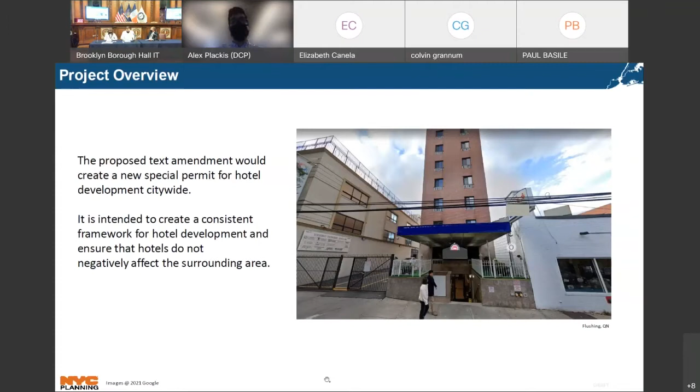So this project is a zoning text amendment that would create a new special permit for hotel development across the city. The goal is to create a consistent framework for hotel development and ensure that new hotels do not negatively affect the surrounding area. Next slide, please.

First, I'd like to start with a description of New York City's hotel market over the past decade. By 2019, before the pandemic hit, New York City had experienced record growth in the tourism industry and its hotel pipeline for the 10th consecutive year. Visitor trends peaked in 2019 with almost 67 million visitors, up from 46 million in 2009. Visitor count was forecasted to increase even more in 2020 to almost 69 million.

Furthermore, sizable growth of hotel room supply has been a prevailing factor in New York City for much of the past decade. Between 2009 and 2019, the total number of hotel rooms in the New York City market grew from just over 80,000 to over 127,000. And in the past 5 years alone, New York City saw a 40% increase in hotel inventory. Despite this increase in room supply, demand also continued to rise, keeping the annual occupancy at almost 87%. Occupancy rates in New York City are among the highest for urban markets in the United States.

The growth of the New York City market over the last decade was driven by both international and domestic travelers. And these visitors are coming to New York City for its cultural offerings, with shopping and sightseeing being the principal reason for about 86% of international visitors. Next slide, please.

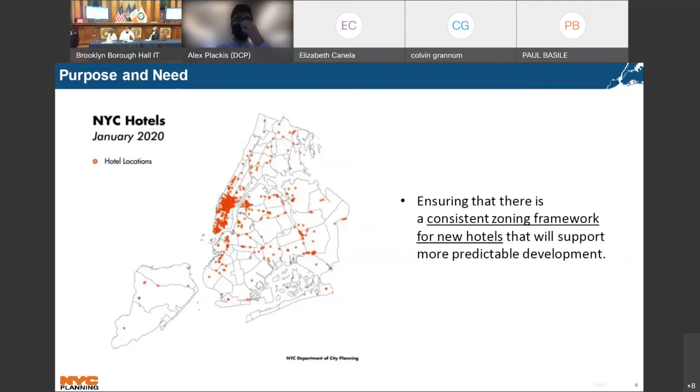As mentioned before, hotels have the potential to create land use conflicts in a variety of neighborhood contexts and zoning districts. We're already aware of the potential conflicts hotels can have in light manufacturing or M1 districts. And several C districts in the city also have hotels in areas where it can be in conflict with nearby businesses, or the site may be planned in a way that may be unsafe for guests and residents alike.

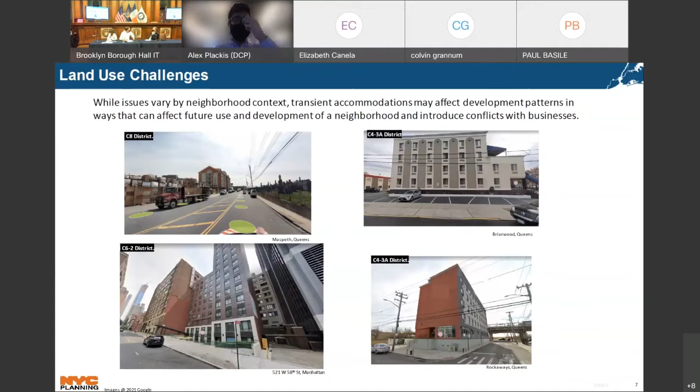So to explain the map on the left side of your screen, the magenta color shows areas that would require the new citywide hotel special permit. This means that any hotel development would need to apply for this special permit with the Department of City Planning. This process would make all proposed hotels subject to ULURP review, which includes time for community boards to review, adopt, and submit a recommendation to the City Planning Commission.

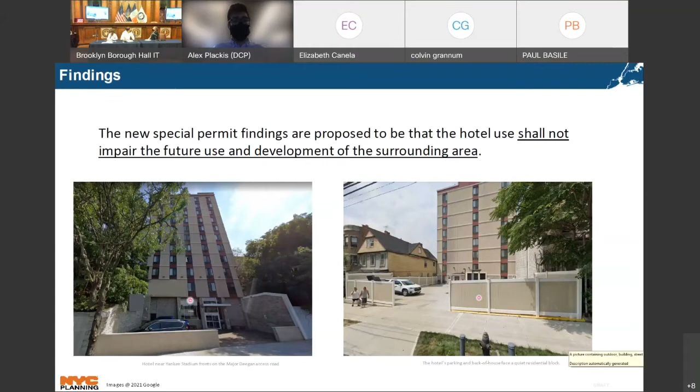I'd like to briefly talk about the impacts of the pandemic on the hotel industry and ways that we have modified the proposal to try to address these challenges.

The COVID pandemic had a significant effect on the New York City hotel market. Between January and November of 2020, a net total of 146 hotels out of 705, and over 42,000 rooms, have closed. Luxury and upscale room types accounted for almost 85% of this loss.

Estimates by the city's independent budget office place job losses in the hospitality and leisure industry at around 197,000 jobs in 2020.

So COVID has had an impact on the hotel industry, but there is optimism that the city will recover and visitors will return, with many experts placing this recovery in 2025. With that return in demand, the Department of City Planning anticipates development to return to pre-pandemic levels, leading to a need for the special permit, allowing for better regulation. However, we do not want these regulations to prevent recovery of the city.

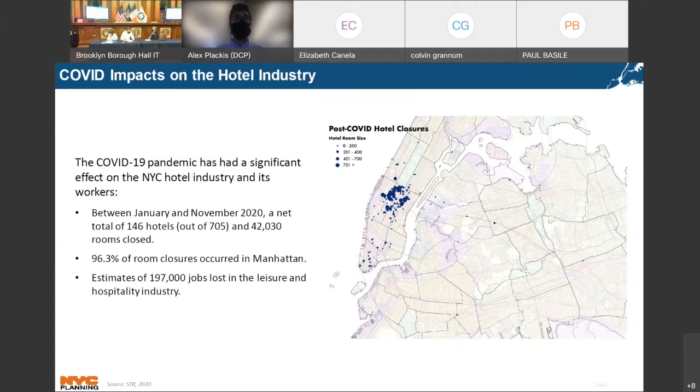To minimize the likelihood that the special permit will impair the recovery of the hotel industry, we have created these recovery provisions. There are modified vesting provisions to facilitate projects that are already in the pipeline.

Approved City Planning Commission or Board of Standards and Appeals applications will not require a special permit if these applications were approved after January 1st of 2018. Applications that begin CPC public review or are filed with BSA prior to adoption will not require a special permit.

And finally, there is an extended discontinuance provision allowing vacant hotels extra time to return to transient use. Usual discontinuance allows for a building that has been vacant for 2 years to reopen with its previous use. We are proposing an extension to 6 years to allow for these closed hotels to reopen. These provisions are meant to allow for a portion of the 42,000 closed rooms to return, bringing back an important industry to New York City.

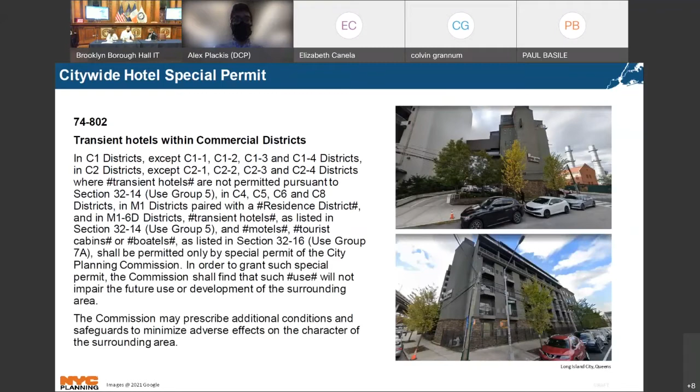Next slide, please. And if there are any questions, myself and I believe Barry Dinnerstein, the Deputy Director of Housing and Economic Development, who is currently in person at Borough Hall, are both more than happy to answer questions.

Thank you very much. I do have a few questions. I think you addressed some of them, but we'll just put them in for the record. Borough President Adams understands that there are currently hotels in various stages of development. Please describe what is being proposed to determine vested status to allow and or preclude continuation.

Hi, my name is Alex Plackis. I'm a city planner at the Department of City Planning. So the current proposal has two classifications of projects.

Projects that had filed plans with the Department of Buildings prior to the referral of the zoning text would be able to continue. Projects must then have a zoning approval by the time the proposed zoning is adopted, at which point they will be able to continue.

Normally, a project must have a foundation permit, a foundation actually in the ground, at the time of adoption of the zoning to continue. But in this case, because of COVID and difficulties people had doing construction, we're allowing people to continue developing their hotel project so long as they have zoning approval prior to adoption of the zoning text by the City Council. They will then have up to 6 years to complete the project, as opposed to 2 years, which is customary for other types of projects when zoning changes.

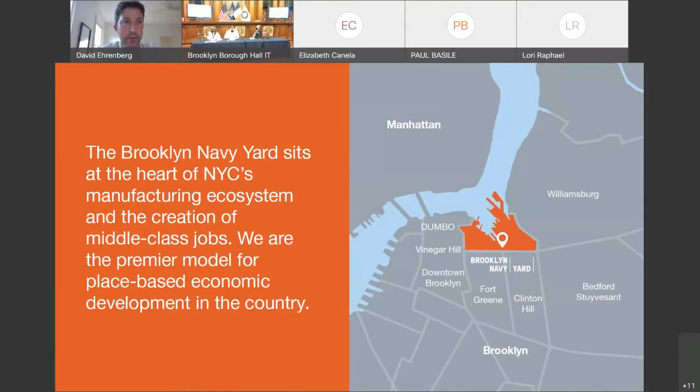We believe that the Navy Yard over the last 20 years or so has emerged as not only a unique ecosystem of modern manufacturers, but really a national model for place-based economic development focused on creating high-quality middle-class jobs that are then made accessible to all local residents. Next slide.

Quickly, just demographically about us, we're large. We're 300 acres, which for Brooklynites is about half of the size of Prospect Park. We have nearly 80 buildings and nearly 6.5 million square feet of real estate under roof. And we're currently home to about 450 companies that house or that have created nearly 12,000 jobs between them.

Next slide. We think about our mission and our model as kind of a three-legged stool. We start with a focus on middle-class manufacturing jobs. We then use the tools available to us as a mission-driven, not-for-profit landlord to help those companies that are creating those middle-class jobs not only survive in New York City, but thrive. And then lastly, we have very robust workforce development programs to help link local residents to the economic activity happening at the Yard. And I'll go quickly through each of these three components.

The focus on middle-class manufacturing jobs is something we live every day, and we think the numbers explain why they are a critical part of the New York City economy. The average wages in the industrial and manufacturing sector are between $50,000 and $75,000 a year, depending on the exact definition. That is a living wage in New York City. And if you compare those to other truly accessible sectors in our city economy, the wage difference is very transparent, nearly double wages. And yet the manufacturing sector is deeply accessible, with about half of the workforce having nothing more than a high school diploma. And if you add a 2-year college degree or post-secondary credential, that goes up to about 80% of the workforce having something less than a 4-year college degree.

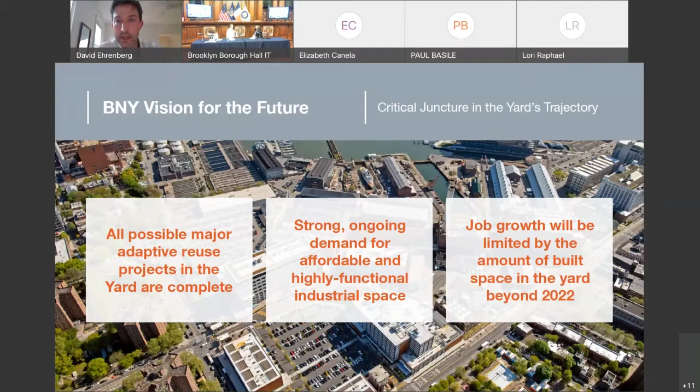Next slide. So 4 or 5 years ago or so, we started a master plan process to ask ourselves, what does the next phase of growth at the Navy Yard look like, fueled not by the adaptive reuse of our previous period, but ground up industrial buildings tailor-made for the needs of modern manufacturers.

We also took the opportunity, as you'll see in the master plan, to integrate the Navy Yard back into the community in ways that frankly have not been true for the 220-year history of the Navy Yard, much of which was during federal control, and then to allow for a mix of uses which are not normally allowed in manufacturing districts, but as I've described, have become very central to our mission. I'll talk about each of these three buckets in order.

Quickly, before the ULURP process, for a number of years we engaged in public conversations, both with local stakeholders, community board, our tenant base, local not-for-profit organizations, and that's just on top of the routine and constant contact we have with these stakeholders as a normal course of our business.

Next slide. The special district will effectively create tailored zoning controls appropriate to the Navy Yard. We think that's appropriate both because of the scale of the Navy Yard, but also the unique nature of the yard as being an industrial asset under the control of a single not-for-profit landlord.

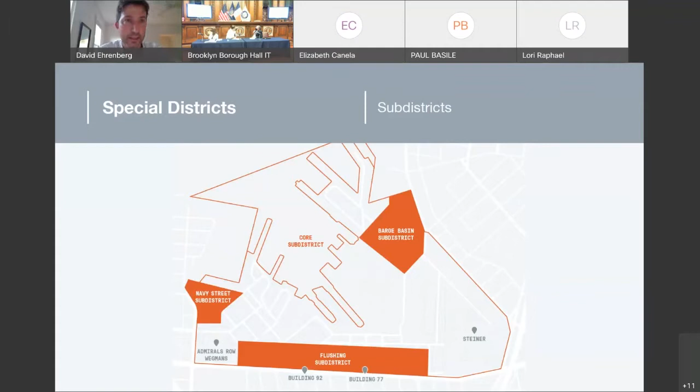Next slide. The special district, the ULURP and the master plan is really focused on these three sub-districts, where we think the majority or nearly all of the future development will be housed. Most of this area is currently underutilized or vacant, except for part of the Flushing sub-district. It's really the easternmost part of that Flushing sub-district which is the underutilized future development site, but we've included the rest of the sub-district to integrate it more into the community.

Next slide. As a thumbnail to explain what the ULURP seeks to do: it seeks to optimize these buildings for modern manufacturers, to preserve the working waterfront while allowing integration with the local community and access to the waterfront and other areas of the yard, and to allow us to continue the mission of connecting local residents to jobs and skills. What it does not seek to do is add any density, any height, or allow any uses that are inconsistent with the current understanding of our mission.

Next slide. So in terms of optimizing for modern manufacturers, that really comes down to rationalizing the amount of parking and loading docks that would be required. The 1961 zoning simply requires far more parking and loading than modern manufacturers need.

We are seeking some changes to the signage regulations, given the scale of the Navy Yard and the need for a sense of arrival when you arrive at the Navy Yard, which has been cut off from the city for so long. And then these XL floors define some of the building forms, and I'll explain the XL floors on the next slide.

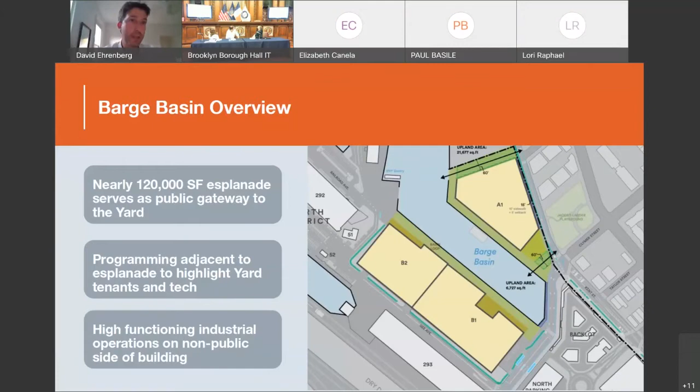And so on this site, we're thinking the showroom use, where you'd have manufacturers, woodworkers making furniture and then selling it right downstairs. Next slide.

Lastly, the integration of uses that are consistent with our mission. The first of those is childcare. We refer to ourselves as an equitable central business district; to truly be that, we must have childcare. We want the ability to do that and to include local residents in that childcare opportunity, so we need a zoning change for that.

And educational uses, which also are not typically permitted in manufacturing zones. But as I've described, we have a CUNY facility, we have a DOE facility, and we want to see more and more of those integrations of educational opportunities with the businesses at the yard.

And our goal through this is that all of this will continue our efforts to put the Navy Yard on the mental map of all Brooklynites as a place where they can come to find skills and to launch their careers.

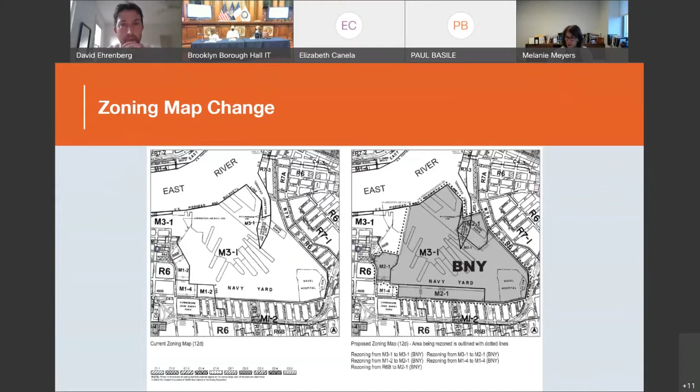There are 2 actions, a zoning map amendment and a zoning text amendment. Here you can see the zoning map change. The Navy Yard would be brought within a special Brooklyn Navy Yard district, allowing for some tailored zoning controls. We would also be rezoning the perimeter of the site to a uniform M2-1 zone that will allow for a consistent treatment of the area, as well as allow for the introduction of a few targeted uses that have a public-facing component.

The zoning text amendment itself starts with the creation of a series of sub-districts: the core sub-district, which is the guts of the Navy Yard and operates today, as well as a sub-district on each of the three frontages, one on Kent, one on Flushing, and one on Navy Street. Those cover the sites of the master plan development and allow for some more fine-grained controls for those particular areas.

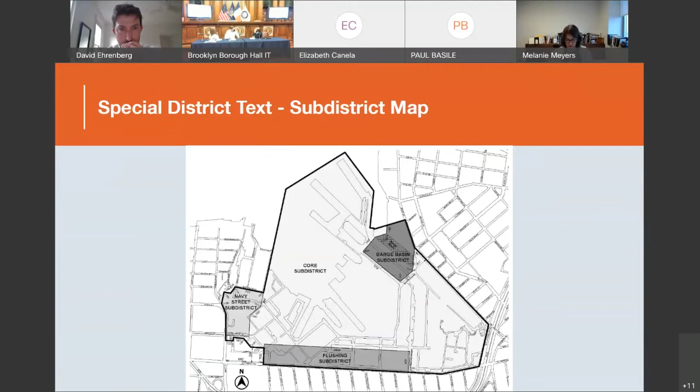There are 5 basic topics that were covered by the zoning: use, some limited bulk controls, a requirement to introduce open space, urban design measures, and finally parking and loading.

Running through this quickly, from a use standpoint, the special district would allow for the introduction of a number of use group 3A community facility uses in the perimeter. Those are things like schools, daycares, museums, libraries, things that we could bring in that could interface with the community, as well as provide for the academic support for the area.

Other use proposals would also allow for some complementary retail within the perimeter sub-districts. This would allow for something like a showroom and retail space for the tenants producing goods at the yard. We'd be making some additional smaller changes, including removing the special permit requirement for health clubs, addressing some performance standards for distilleries, and allowing within the core, by authorization of the City Planning Commission, the addition of schools and colleges with programs complementary to the yard operations.

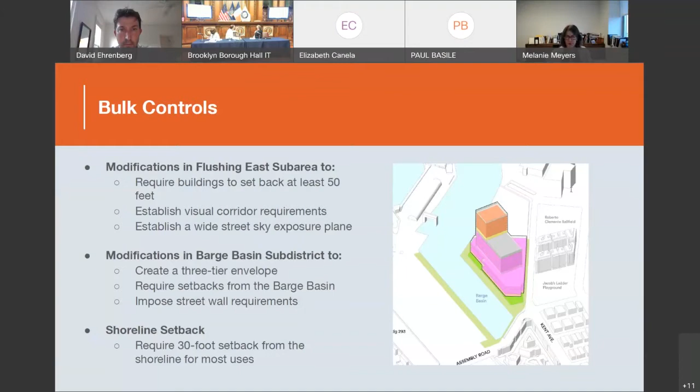That will affect some of the controls that exist at Barge Basin, as well as with the Flushing East sub-district. We're also eliminating the yard requirement for the yard, since the yard's so big, it would just be a very small piece. But we are introducing the concept of a 30-foot setback along the shoreline, and that's to address some future thinking about resiliency measures over the years, to allow for buildings to think about sea level rise and to think about the future of the yard in a way that ensures it can include resiliency components along the waterfront.

An important element of the special district text is the requirement for the introduction of open space as each of the master plan developments go forward. The zoning will require that there be an open space component with each of the Navy Street subdistrict, the Flushing Avenue subdistrict, and along Barge Basin.

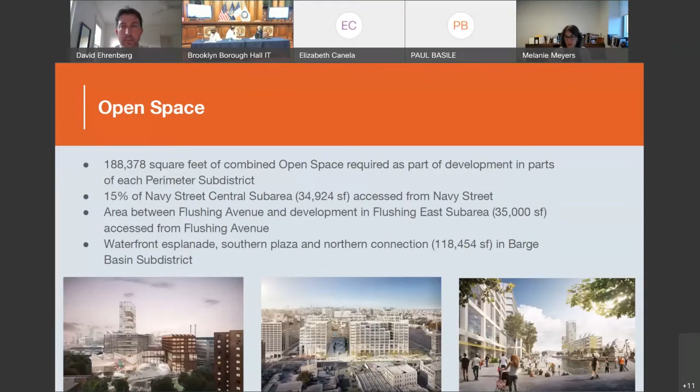The open spaces on Flushing and on Navy Street would be adjacent to the adjoining streets, inviting the community in and creating a plaza-like amenity on those two areas. For Barge Basin, the requirements would allow people to come into the yard, come to the water, and create a pedestrian esplanade around the Barge Basin. In total, there'd be about 4.3 acres of open space created as a result of the text.

As part of that, there will be urban design controls for the portions of the buildings that face the streets and the open spaces, which will include a combination of transparency requirements, use and floor area wrapping requirements, and articulation requirements, in order to create a lively and engaging street frontage in these important areas.

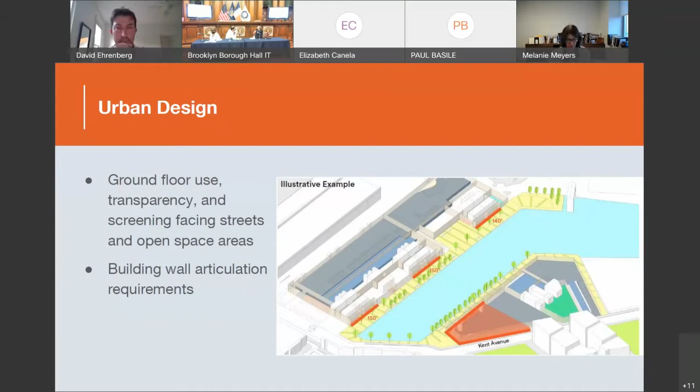And then finally, the last portion of the proposal relates to parking and loading. The proposed zoning text will allow for parking requirements to be replaced by a transportation management plan focused on optimizing alternatives to cars to get to the yard. It would be an ongoing plan, updated every 3 years with a public component so people could see the statistics for how people come to the yard and how things have changed over time. We think this will be a great way to ensure we have the most optimal mix of parking and transportation measures.

We are also looking at controlling loading through limiting the number of curb cuts on the site, to avoid conflicts between loading coming in and out of the yard and people using the surrounding streets. We will also maintain the standard requirement for bicycle parking, but to facilitate use, we'll allow 50% of the required bicycle parking to be located in the open.

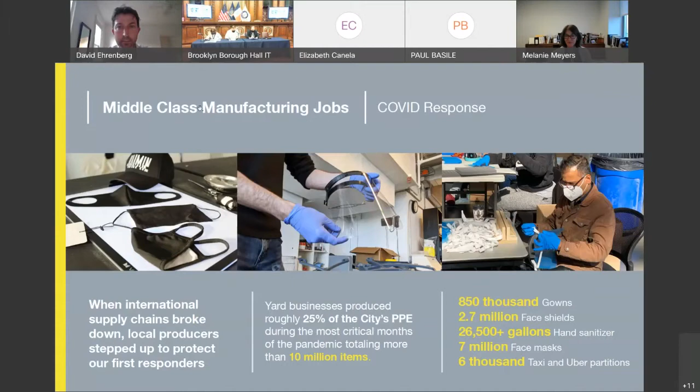Thank you. First question: how would the represented plan intent be memorialized? So, the yard has a long track record of fulfilling its mission, and this is going to be no different. We published our master plan a number of years ago. Parts of it are publicly accessible, and that master plan is really focused on supporting our mission and executing our vision to continue to grow. This rezoning is a critical step in that, and really seeks to embody that master plan. So between the master plan and the zoning text, I think that's where it's all memorialized.

So what factors will determine which location might include childcare facilities? I would say adding a childcare facility is a very high priority for us. We hear it from our tenants all the time and the local community. It's our expectation that we will likely pursue a childcare facility in one of the earlier, if not the first, building that's developed. However, we want to make sure the surrounding residential communities have access to that facility, and we'll have to analyze which of the master plan sites best achieves that goal. It's worth noting that the special district text only allows these childcare facilities in the sub-districts at the edge of the yard, to make sure the local community has access to them.

I would love to. Thank you for having me. My name is Eric Palatnik, and I am a lawyer representing Paul Basile and his family in this rezoning application. And I believe you have a presentation of ours, if you could pull it. That's great. We're proud to be here in a presentation that's uniquely similar to the project you just had in front of you, creating Brooklyn Dream Maker Studios, which is the continuation of what the Basile family has been doing in the neighborhood for years. And what we're before today is for a rezoning to change the property I'm going to show you in a second from an M2-1 zoning district to a C4-4A zoning district, which is an R7A equivalent.

Next slide, please. These are the properties that are involved. There are 2 sites. There's 506 3rd Avenue, which you're looking at right here, which is an old oil company where they had the trucks. Right now, Prop to Cup, which is a coffee company, is in there right now at the ground floor.

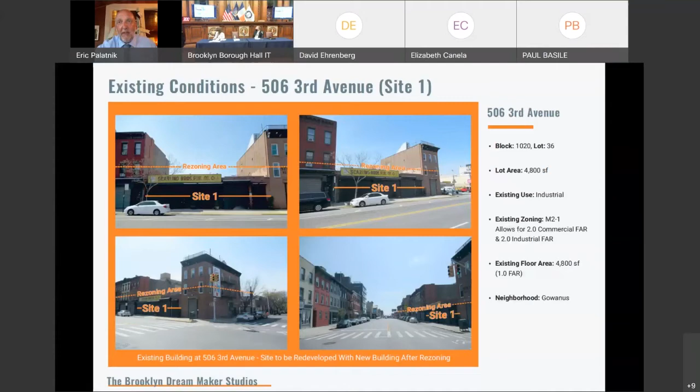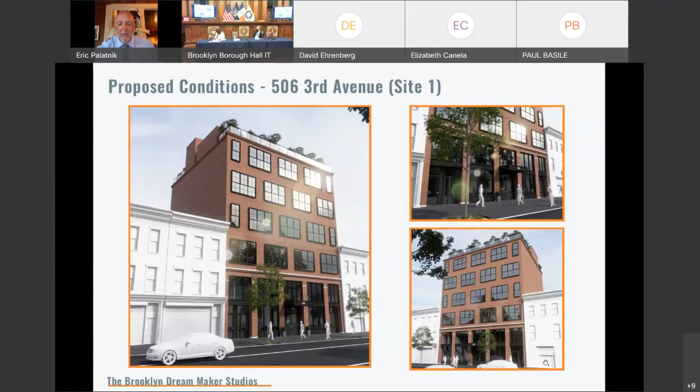We're proposing to rezone this site and the next site. If you can go to the next slide, please. Oh, there's another image of this site. I apologize, this is showing you what the site looks like. I think that's good, you can keep it there for a second. Thank you for staying with me. This is showing you an image of what 506 3rd Avenue will look like if it should be approved. The next slide, please.

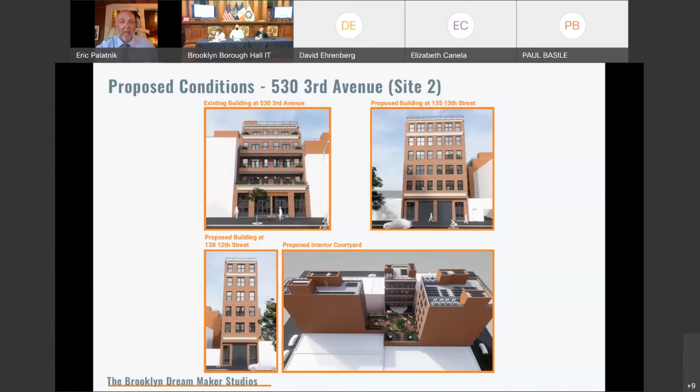This gives you an image of what the buildings will look like, as well as their shared common space. The buildings are dream maker spaces, essentially very small businesses including artists and other craft makers. Those businesses need a communal type of space to work, similar to what you just saw at the Brooklyn Navy Yard. What the Basile family is presenting tonight is something very similar, a shared workspace where users have their own individual space to work but can collaborate with other users, whether in the common area you see here or in various facilities around the buildings, which I'll show you in a few minutes.

Next slide, please. This gives you a good idea of what the rezoning area is and what we're asking to do. The left side of the screen is the existing zoning, the right side is the proposed. Equally important, Site 1 and Site 2 are highlighted. Site 2, at the bottom of the screen in both slides, is the T-shaped lot I mentioned a moment ago, where you have the existing building on the lot that utilizes the air rights. Site 1 is a freestanding lot that's all by itself.

It's important to note that all of the other properties up and down the block are basically residential. Also across the street, you can see an R6A district in one portion and an M1-2. On the right side of the screen, we're proposing to rezone the area to a C4-4A zoning district. As I mentioned, it's an R7A equivalent, and what it will allow for is commercial uses within the building, the dream maker uses and spaces I'm talking about. I'll start to show you some examples in a minute.

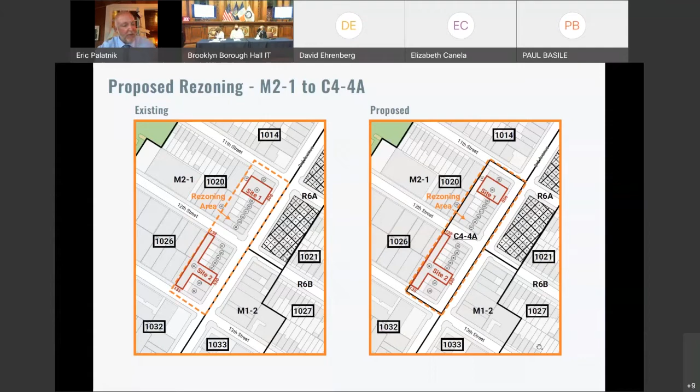Next slide, please. Here you can see on the left side what's existing, on the right side what's proposed as far as the zoning goes. I'm speaking to a very knowledgeable crowd, so you all know what an M2-1 district would allow for. A C4-4A allows for a mix of both commercial and/or residential. It is proposed to be an entirely commercial development; we're not proposing any residential. But we're proposing the C4-4A because, as I mentioned, the block has no commercial on it. So the C4-4A is a mixed zone that allows both residential and commercial. It really serves as a nice buffer between the more intense industrial business zones around us and the manufacturing, residential, and R6A that's across the street.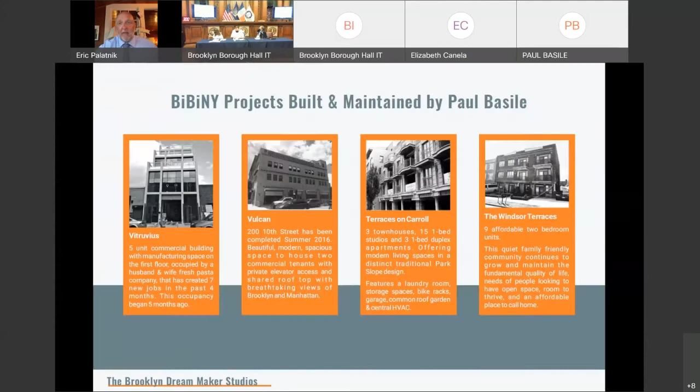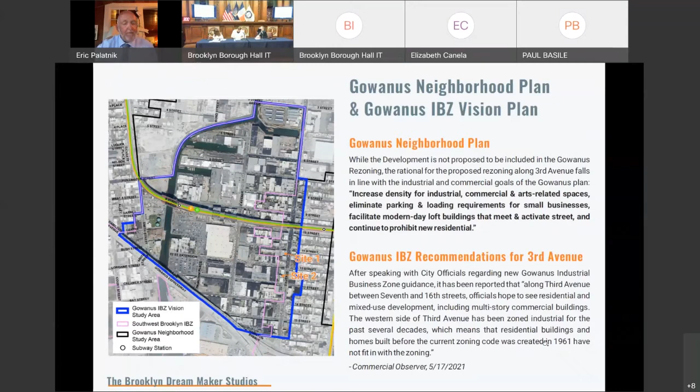Here we give you a narrative of what's going on around us, so you can see the area in more detail. You can clearly see the row houses, typical Brooklyn 3-story row houses that surround us on each side. I'm trying to demonstrate that this side of the block is not an industrial side, nor a quiet residential side, because it's got manufacturing behind it, but rather it's the buffer zone, as I've been saying.

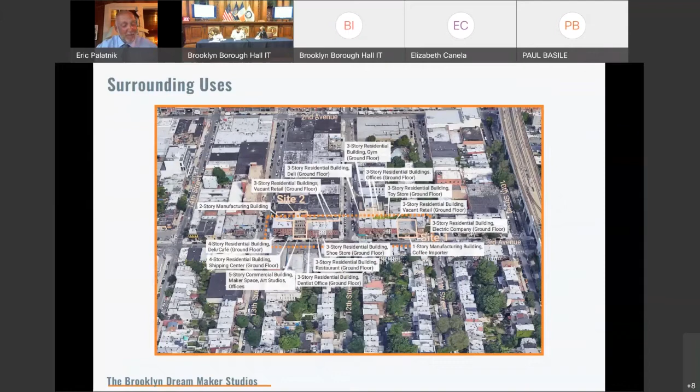This reinforces what I was speaking to a moment ago, showing you in more detail the rezoning area. Site 2 is on the left, shaped like a T, and Site 1 is on the right. We're showing the heights of the buildings fronting 3rd Avenue, which is primarily 3-story brownstones or row houses, and also clearly showing what the heights of our buildings will be next to those.

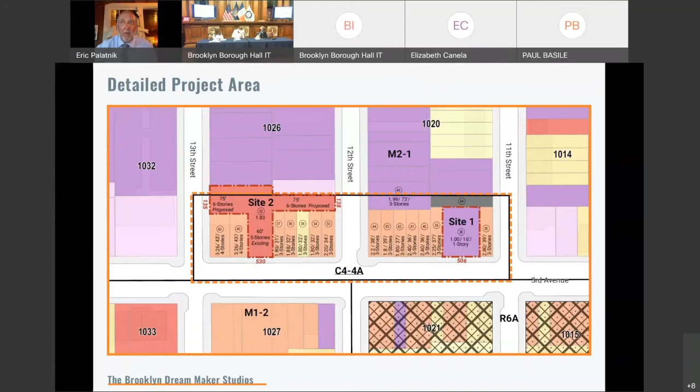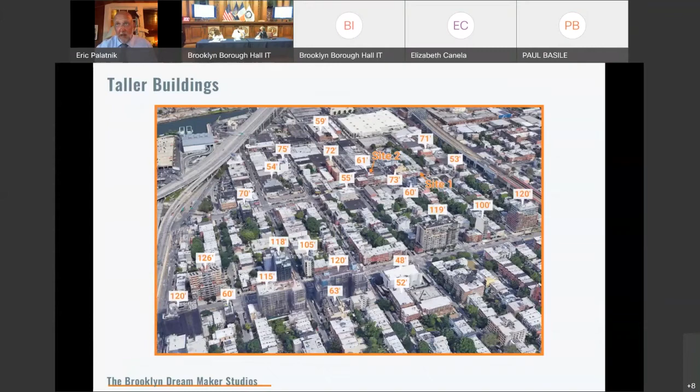This slide gives an idea of the mixture of building heights that occupy the neighborhood. As you can see, our buildings, which are about 75 feet, fit squarely within the smattering of buildings in the neighborhood, which range anywhere from 60 feet up to 100 or 120 feet, with most resting right around the height we are.

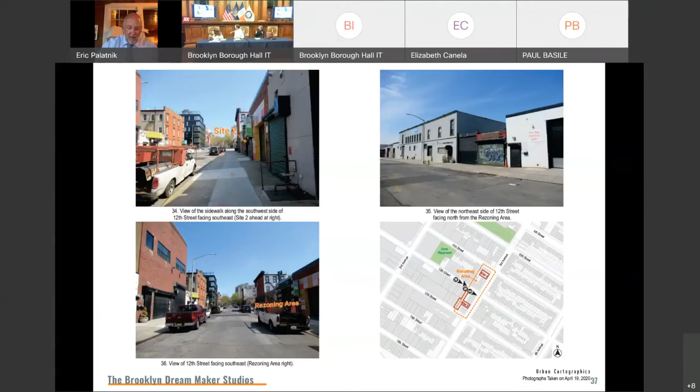I'm not going to spend much time on the ground since I've shown you a lot of pictures and you're familiar with the blocks. Unless anyone has questions about the pictures, I'll ask you to skip forward to the page where the plans are. They're not labeled, but you can stop right at the sustainable features page.

That'll be great, we can show the zoning change. This gives you more detail on the zoning district change, which I've already shown. You can see here on the left side, it's M2-1. On the right side, showing the rezoning area, C4-4A.

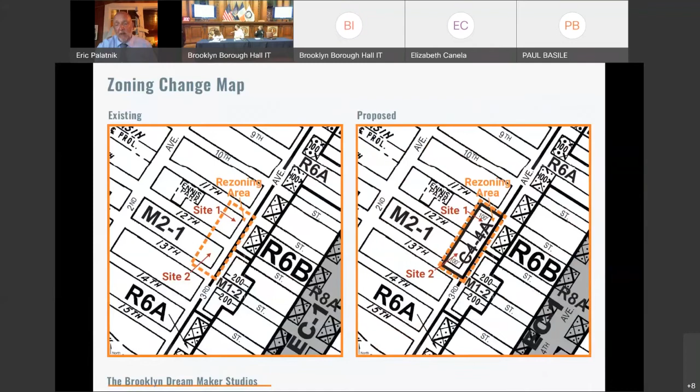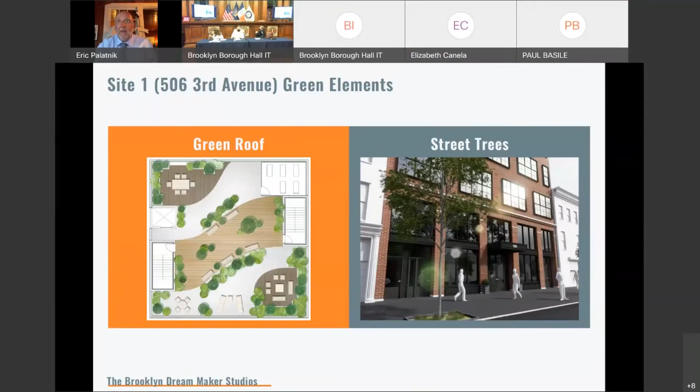This shows 506 3rd again in more detail with the roof, and shows the idea of having a communal area for people to utilize.

Here you can see at 530 3rd, giving you an idea of what the courtyard will look like when everything is completed.

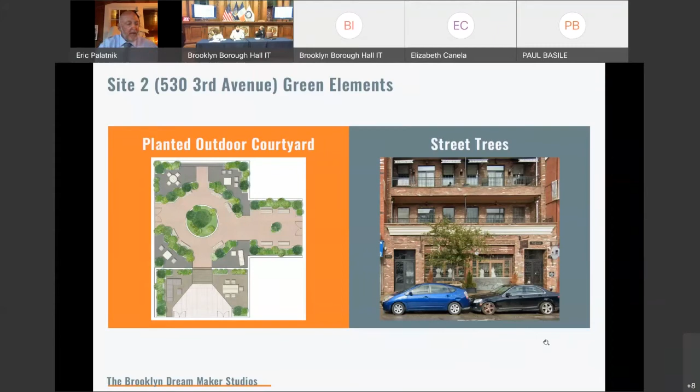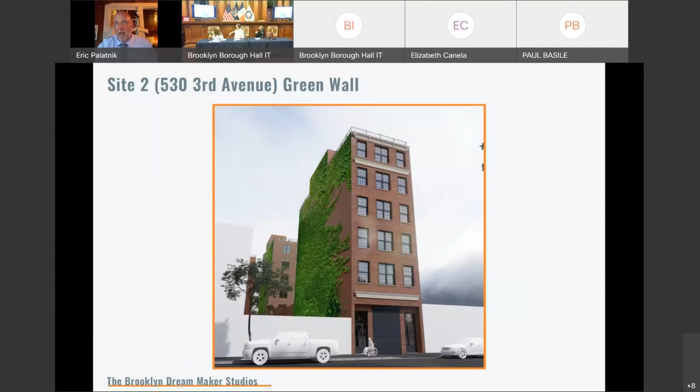This gives some more idea so you get a good feeling of the color and imagery that will be put in there. This is a green wall proposed for the buildings on 12th and 13th Streets. Their side, shown in green, faces the rear yard of the residential buildings on 3rd Avenue. So we are proposing a green wall that will be horticulturally maintained, designed, and operated in a way that keeps it green without damaging the wall itself.

This shows where trucks or loading berths would be at the ground floor for each site, in case of a panel truck delivery of any sort. There really is no intention to have trucks come in; this is more for someone offloading equipment or supplies they need, a place for them to come into.

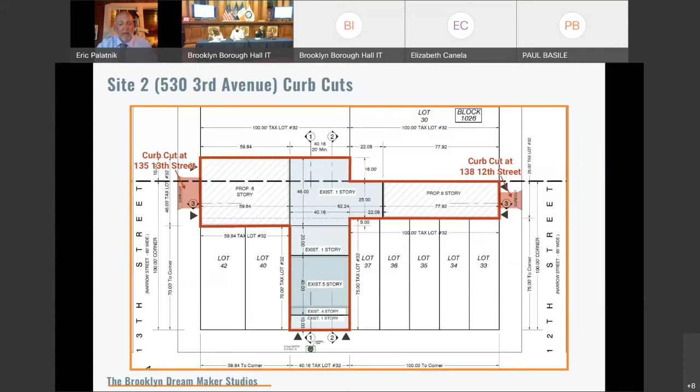Now we're in the plans, which you've pretty much seen already as we've gone through the proposal, but I'll show them to you in a little more detail.

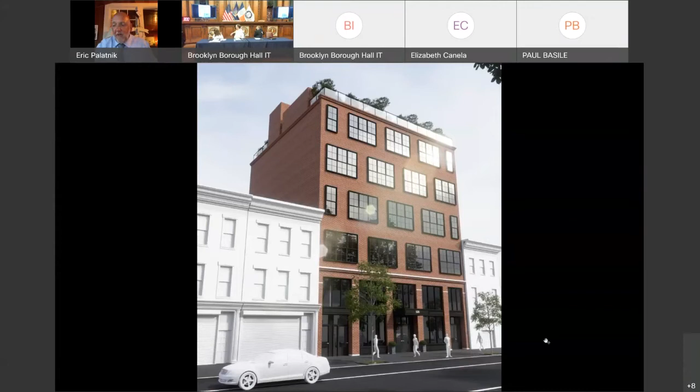This is 506. It's a relatively straightforward 5-story building. It'll have approximately 18,000 square feet, including 2,300 square feet at the ground floor. At the beginning of the presentation, a comment was made that there'll be retail at the ground floor. There really is no retail proposed. All of the spaces are really proposed to be maker spaces.

And here you can see again the different perspective of the building. Very tastefully designed and well suited for the neighborhood.

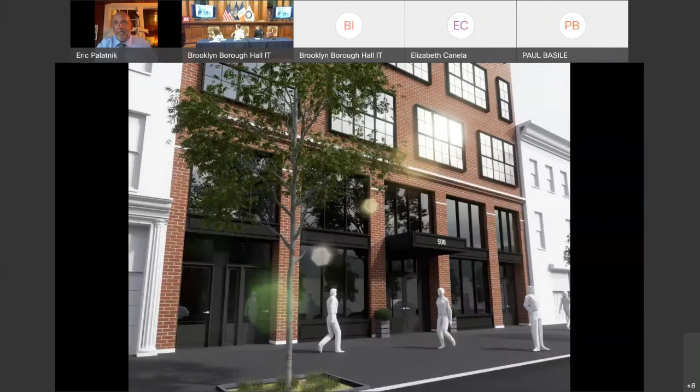And that's the idea for this. We get the same gist the whole way through.

We can show you a floor plan. We'll show you an elevation. The elevation, you understand, the building's gonna be 75 feet tall, 5 stories. And the next slide should give you a good example of the different spaces.

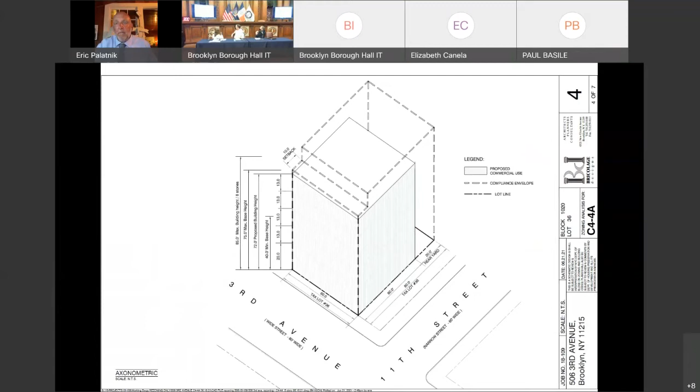If you click forward a few slides, you can get to the next building. You'll see the imagery for it. 530 3rd Avenue.

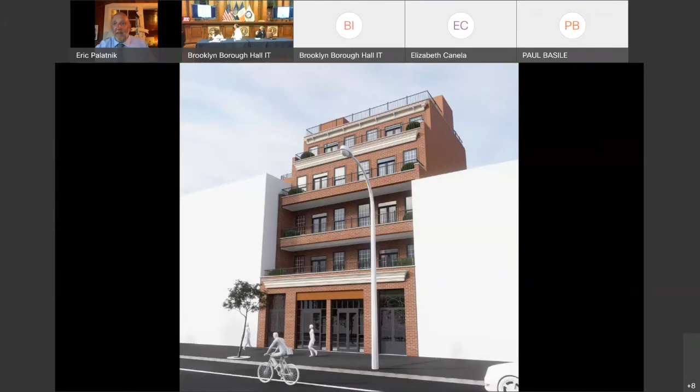This is the building that already exists. This is the one you saw in the pictures that I said he developed, utilizing the development building behind him. And what you're looking at, next slide.

This is 12th Street, 138 12th Street. It's a 6-story building that's proposed, and it'll stand about 77 feet. That was the one that has the green wall on the left side. It's not shown here, but is what we're proposing.

And here you're seeing the 13th Street property, which is 135 13th Street. Again, similar to what you just saw on 12th Street. If you click forward a few slides, it'll give you some more imagery so you can get a perspective of it.

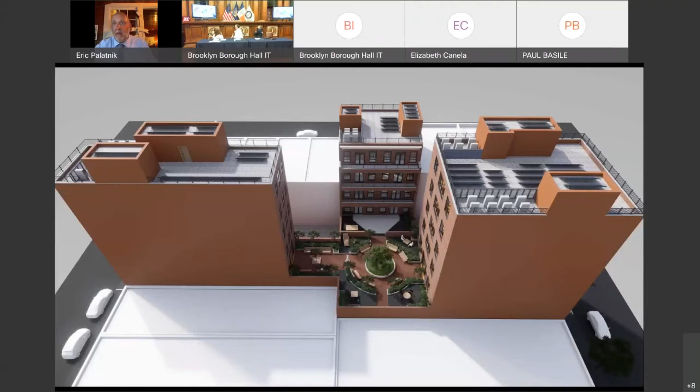Again, we're stopping here to show you the communal space that's in between all the buildings. It's proposed to be shared, and there's a space within the buildings where there's a place for people to gather.

That's essentially the proposal. We have more plans that we could show you, but I know you have a busy evening, and I'd be happy to pause here and answer any questions you may have.

Thank you. I think you addressed this in your presentation, but given the applicant's intent to develop a commercial office building, why request a residential district as opposed to one that does not permit residential development?

Yeah, that's a good question. Unlike the Brooklyn Navy Yard that you just heard about a few minutes ago, where they created a special district for themselves, as well as Gowanus, where they have a special district created, we didn't create a special district here because the rezoning action was not big enough. So we're forced to use whatever's on the table, so to speak, off the shelf from City Planning's arsenal of rezoning tools. Here, the C4-4A is the proper district because it allows both residential and commercial to exist.

And although there's no real desire right now, nor is there an intention, there is residential on the block and there is residential around us, and none of us know what the future may hold. So the C4-4A gives the opportunity to allow the building initially, definitely, without a doubt, to be filled 100% commercially for the foreseeable future. But it also allows the building to transition, if it should need, or to use a modern day word, pivot, if the issue should come up, into something that could also be equally useful for the neighborhood if that time should come.

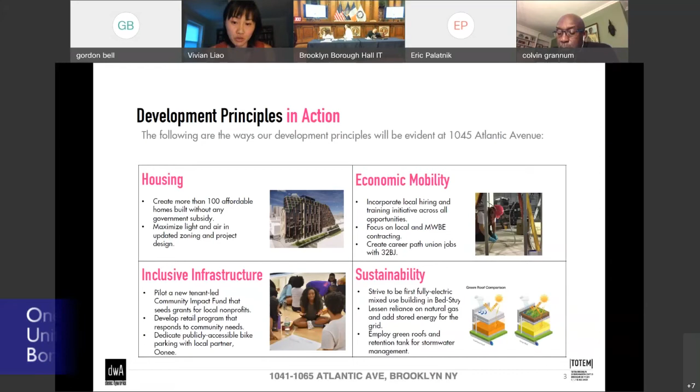Now I'm going to turn it over to my partner, Tucker Reed, to introduce you to the specifics of this project. Thank you so much. Thanks, Vivian. Next slide, please.

Next slide, please. So just to orient ourselves to the site, we're using the working address of 1045 Atlantic, but it's actually a 5-parcel assemblage on Atlantic Avenue between Franklin and Classon, as demonstrated here.

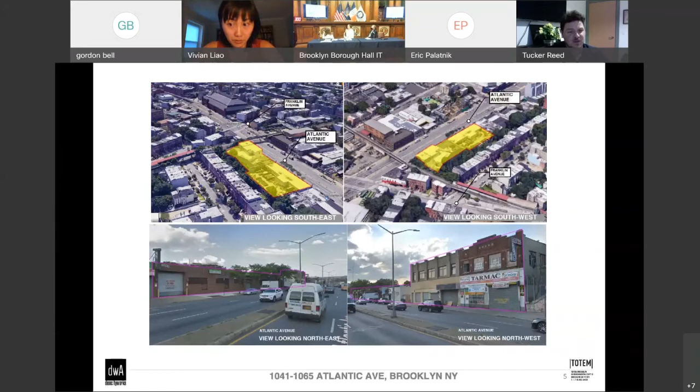The existing character of many of the buildings is kind of underutilized industrial. Many of the buildings in the footprint are actually vacant today. There are a couple of legacy uses around automotive repair and plumbing supplies that will be closing down in the next year. Next slide, please.

Vivian, I think, gave a nice overview of our firm and how we approach things, but one of the big pieces of what we do is, we're all Brooklynites. We know these neighborhoods intuitively, but we really like to dig into the data. And so we pay a lot of attention to planning documents that city agencies or CBOs have been working on in the locales where we're focusing our projects.

We paid close attention to the Bedford-Stuyvesant housing plan, where, over the course of the year, HPD gathered feedback on how to preserve affordability in Bed-Stuy using city-owned land.

And if you go to the next slide, please, you can kind of see that they found a number of important things, specifically showing that Bed-Stuy households has varying incomes across households, but we overlaid the change in incomes from 2005 to 2015, and really noticed that the kind of middle or low to middle moderate income housing needs were not being addressed by the marketplace.

And so we've really tried to target modifying the off-the-shelf MIH program, really tried to target it here to income bands ranging from 40 to 100% of AMI to really help address that kind of acute need in Bedford-Stuyvesant. And we'll talk more about that as we go through the presentation.

Next slide, please. One of the other kind of great data points here, if you look at the number of units that have been built specifically in Community Board 3 over the last 7 to 8 years, there's been close to 300 projects, almost 3,200 units of market rate housing that have been developed in Community Board 3.

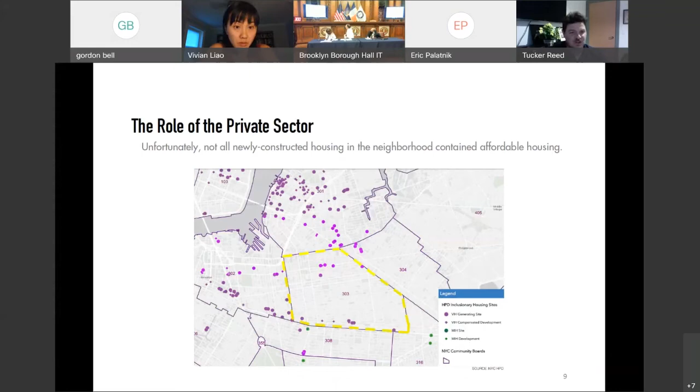But when you juxtapose that on the next slide to the number of affordable units that have been built using the voluntary inclusionary housing program, to the best of our knowledge, no MIH has been mapped here yet. It's a paltry sum.

And so when you kind of look at them in aggregate on the next slide, you can kind of see almost 3,200 units of new construction housing, only 200 of which has been for affordable housing. And so we're really looking at this opportunity here in this site to harness the power of the marketplace to deliver affordable housing on this site that requires no city subsidy, no government support beyond the zoning change.

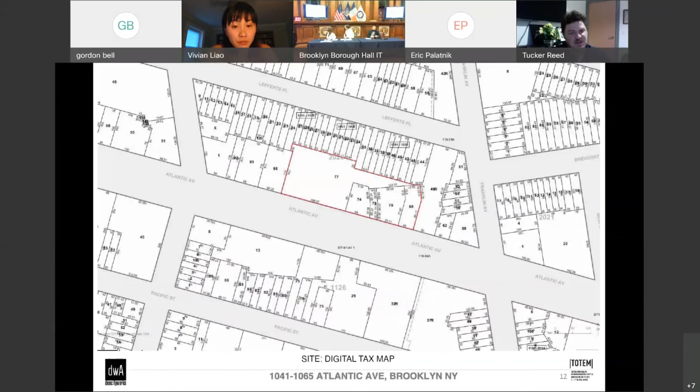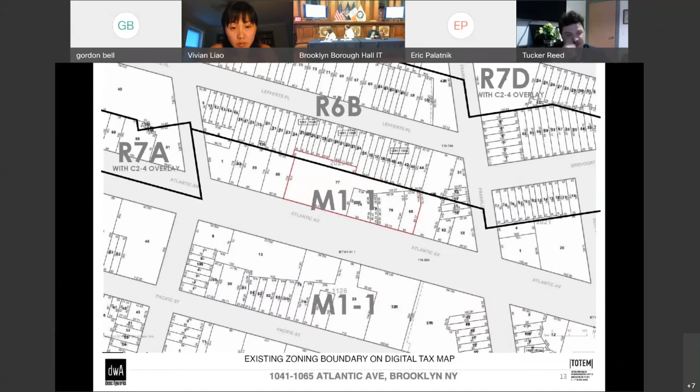So next slide, please. You can start to see our very esoteric zoning map. I think on the next slide, you start to zero in on the 5 parcels that I mentioned that we own today. They are currently zoned, on the next slide, M1-1, and the zoning change request, on the next slide, is through a rezoning to C6-3A that would provide for a mix of uses of both residential and commercial.

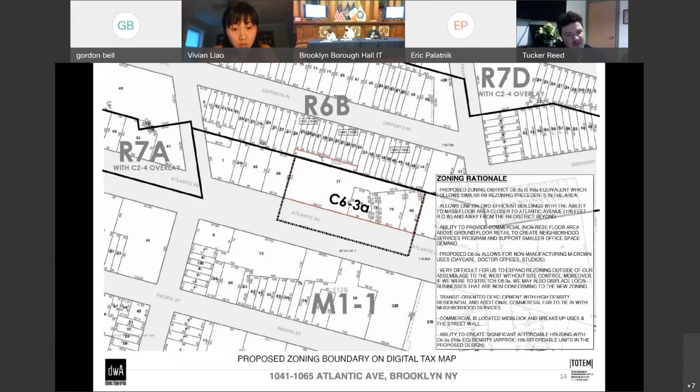But we paid very close attention to the M-Crown planning efforts that have gone on. We met with Community Board 8, I think half a dozen times over the last year, to really arrive at a zoning approach here that was acceptable to them.

Our site actually falls within what the framework called for: higher density commercial and manufacturing uses. We're flanked on either side in the planning framework with higher density residential use in the red. After consultation with Community Board 8, we heard that their priority is much more around the provision and creation of affordable housing on this site as opposed to higher density commercial uses. We can talk a little more about that later in our presentation.

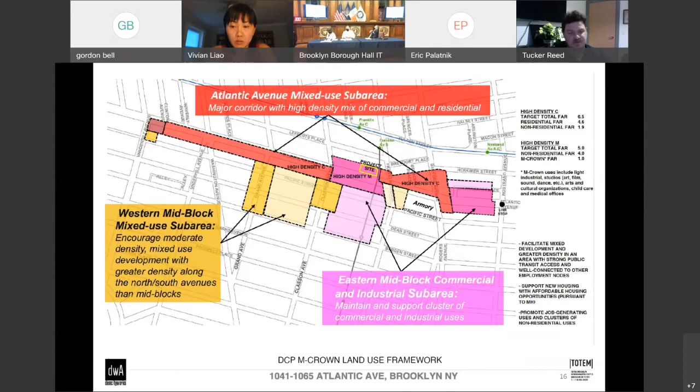But keep going, please. We can transition into the proposed program of this building. On the next slide, you'll see how the C6-3A plays out on this site.

A couple of interesting things to note here. We do plan to have first floor retail, and part of the priority in conversation with the community was to make sure that some of that retail was set aside for neighborhood entrepreneurs.

Working with our partners at Bed-Stuy Restoration, and you'll hear from Colvin Grannum later who'll speak a little more about this, it was also a priority of the current council member, Robert Cornegy, that a significant portion of that retail be set aside and carved up into smaller spaces for neighborhood entrepreneurs and neighborhood businesses to take space for retail use on the street.

We've also, in trying to not completely discount the M-Crown effort, committed to a second story of commercial that could be a mix of office and neighborhood services. So you could think of educational or medical uses on the neighborhood services side, and on the office side, again catering to local small businesses that may be interested in opening a commercial operation on site.

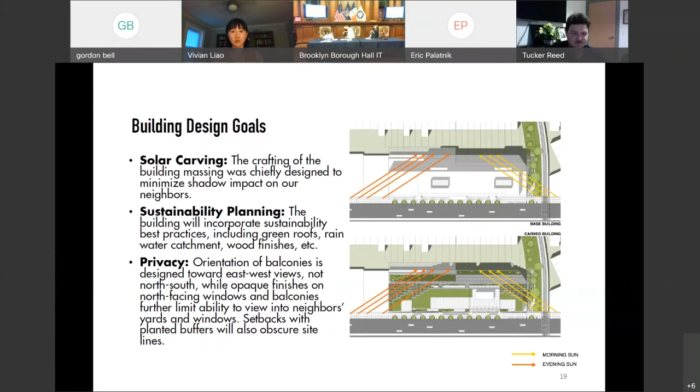With that, I'm going to ask Bhaskar to take over and quickly talk through more detail on the building program. Thank you, Tucker. Next slide, please. So my name is Bhaskar, I'm the principal and founder of Density Works Architecture.

What you see here is the off-the-shelf proposed massing of an R9A building and what it would look like as proposed on Atlantic Avenue. So you're looking north up the sheet, and down sheet is south. You can see on the north side is a lower height district.

First thing off the bat, what we decided — if you notice in the lower right-hand corner of the proposed building — is that our site goes past the mid-block line about 20 feet, where we've chosen not to put any structure, in order to separate our building and load the massing more towards Atlantic Avenue, moving the massing away from the low height district. Next slide, please.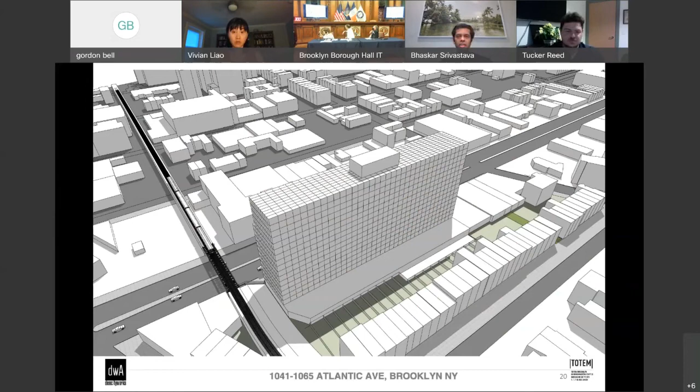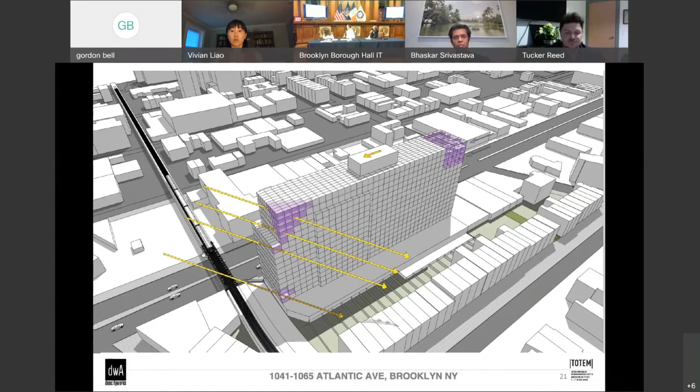In addition to the heights and setbacks that the basic zoning requires, we've gone above and beyond. The building is required to have a setback on Atlantic Avenue, but we've turned it around and brought the setbacks around the building towards the back. So at both ends, the building is further set back than it needs to be, allowing less presence of the high-rise portion. You also see the sun rays carving through the building and removing the massing, making the building lighter and allowing solar access into the backyards.

Further, you see the sun rays from the southwestern sky, and we let the sun, almost like laser beams, cut through the massing of the building and carve it to create a very unique massing on this building.

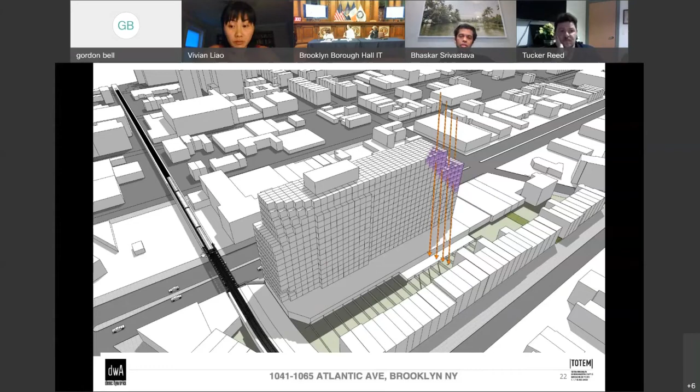This is above and beyond code. We've been very responsive to what we heard at the community board, responding to the privacy needs of our existing neighbors. So what we did, as you see at the bottom, is buffer all these setbacks with green roofs so that people in the building cannot come up to the edge, creating a privacy buffer between our building and the neighbors to the north. At the same time, almost 50% of the building would be green roofs.

The next slide shows how this impacts the design. Almost 50% of the roofs facing north would be buffered with green roofs, whereas the southern side would be the accessible roof for tenants, using a very light, high-albedo paving which mitigates the urban heat island effect by reflecting the sun. These spaces are pushed toward the southern side, allowing further privacy from the green roof, which also helps the heat island effect and creates a more sustainable design.

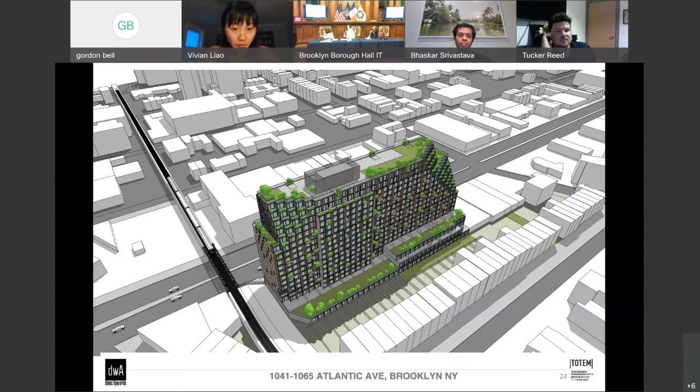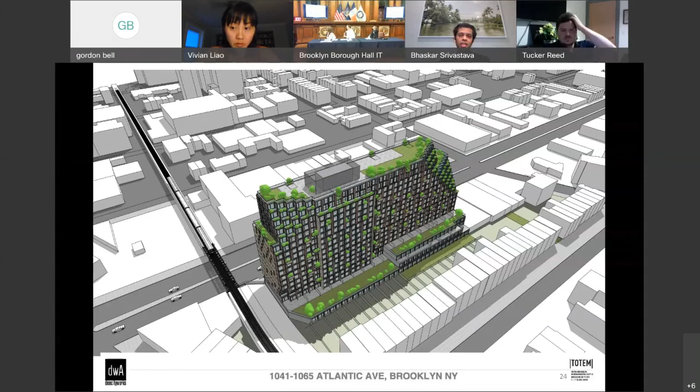The land use rationale is that the wider the street, the more infrastructure and building height it can support. This is not new to us; in fact, most of the world uses this rationale worldwide. What you see here is the southwestern corner of this district. Most of the district is an R6A district with street widths of about 70 or 80 feet.

It's a beautiful district, and parts of it are landmarked for an amazing street character. But in the last few years, more density has been added on Fulton Street, for example, an 80-foot wide right-of-way, using the rationale that a wider street can support more infrastructure. So staying in proportion with that land use rationale applied to Fulton Street, we'd apply a similar rationale to Atlantic Avenue, which is 1.5 times the width of Fulton Street.

So we are proposing a height and FAR which is 1.5 times that on Fulton Street, giving us the C63A R9A proposal you see here in our building design, a 175-foot tall building with an 8.5 FAR proposed on this site.

Here you see the proposed building relative to the street width of the right-of-way of Atlantic Avenue. In the background is the elevated train line we're right next to. The building has a setback which is our base height, an homage to the height of the buildings on Fulton Street and a datum of the Armory building across the street. Beyond that, as we go up 3 or 4 floors, we further carve the building and lower it with green roofs to make it more sustainable, adding another 30 inclusionary housing units to reach a height of 175 feet.

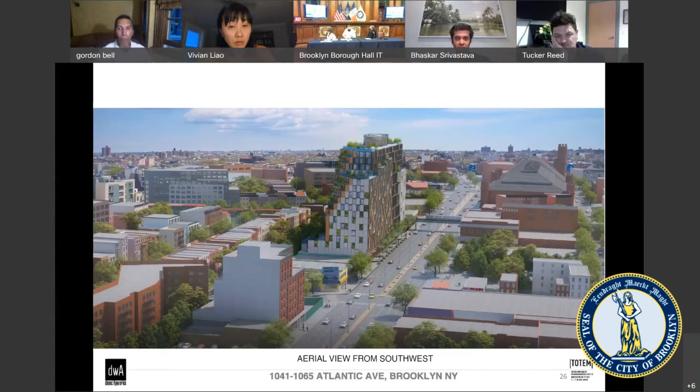This is the view of the building looking towards downtown Brooklyn. Again, you can see how the street width of Atlantic Avenue can support this kind of density, and how the building height is loaded on the wide street, whereas the back of the building is carved down to allow sunlight on the north side.

And the next slide, please. This is the street character of the project that we are envisioning, how to make the sidewalk. We have a 370-foot long sidewalk. How do you make it hospitable to pedestrians?

We are seeking a transit-oriented development here with the workforce housing option. People should have clean, friendly access to the mass transit that is less than a block away. So we are making the streets very pedestrian-friendly. We are providing a sidewalk widening that allows for local businesses to spill out onto a private portion of the lot. At the same time, it allows for a wider reading of the sidewalk, some continuous rain protection that allows for street animation, people to walk along this long sidewalk.

So this overall is the character of the street we are proposing. And in the building design, you can see we are proposing a regenerated, sustainably harvested wood cladding to create a very unique profile that merges really well with the brownstone district that we kind of bookend in this community district.

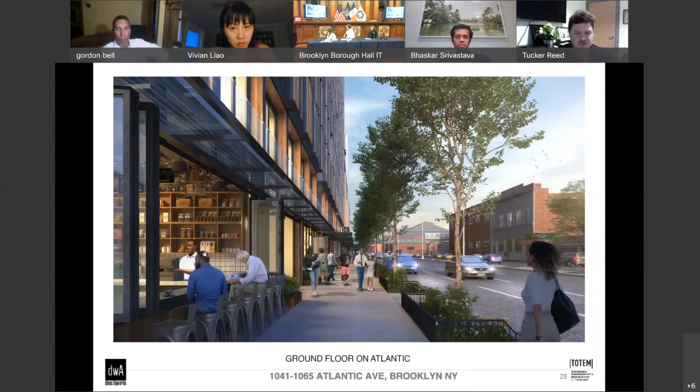Obviously it is a big priority for us, and I think for our partners at Restoration and at St. Nick's, that as many of these units as possible go to local residents of Bedford-Stuyvesant. Obviously there's a 50% community board preference for CB3, but we'll be making real efforts to try to market these units to get as many people from Community Board 3 prepped and into the lottery for this site as possible. And again, these units will be permanently affordable - many people understand with the MIH program that these units are in perpetuity designated as affordable housing.

We could start to talk a little bit about some of the other community benefits associated with here. I'm going to turn it over to Colvin Grannum here in a second, but I just want to say that Bedford-Stuyvesant Restoration Corporation has been kind of at our side from the inception of this project, helping us to shape the program, helping us to orient ourselves to the community even further, but really set some pretty ambitious goals for the building beyond just the affordable housing component. So we really want to take a minute to talk you through those here now. So I turn it over to Colvin quickly to kind of highlight some of the thinking on that front.

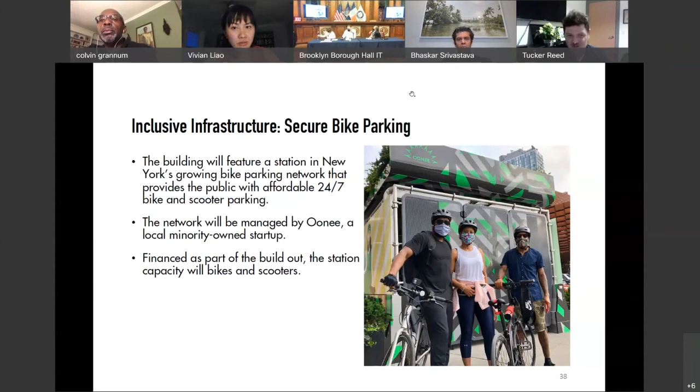But to take it one step further, on the next slide, we've really been exploring some innovative technology. I know the Borough President has been a real leader on this thinking, and it's kind of inspired us to look into it further.

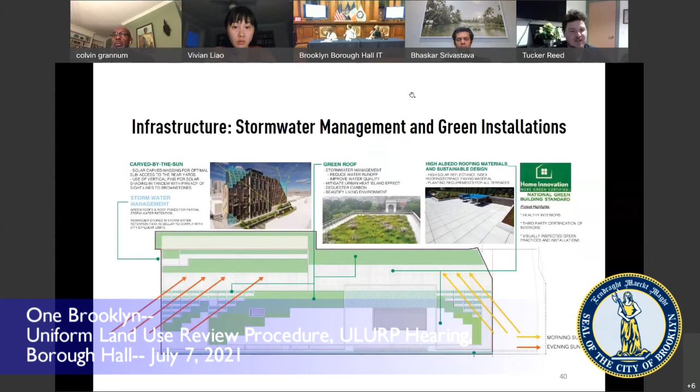Around grid-connected battery technology that we are looking to install in the building, which would draw power from the grid during off-peak times, think overnight or low demand times, and then store that power and use it to not only power our building during high usage hours, but also potentially feed back into the grid in times of high demand.

Recently, I think last week, there was a warning from Con Ed about a brownout or blackout. And so we like to think that this technology in Bedford-Stuyvesant would allow us to be additive to the neighborhood's infrastructure as opposed to drawing on it.

And what it would also allow us to do is greatly reduce our greenhouse gas emissions on our project, since we're not planning to install natural gas in the building at all, either for heating or for cooking. So this technology will allow us to make a completely battery-powered energy storage system for the building.

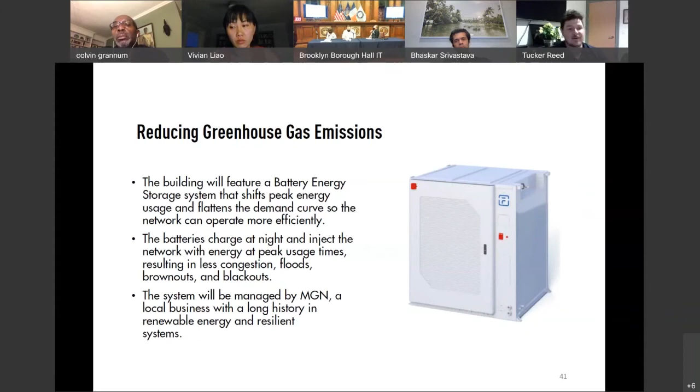And then the last slide, just to recap, hopefully it came through, a lot of the efforts that we've tried to make on not only creating a significant amount of affordable housing on the site. If you'll recall, only 200 units of affordable housing have been built in Community Board 3 over the last 7 or 8 years. This would be more than a 50% increase through our one site alone to help address the significant housing shortage that is plaguing Brooklyn generally.

But also a kind of suite of what we think of as our forward-looking goals that we've tried to set for ourselves around MWBE participation, around union jobs, around inclusive infrastructure, specifically a kind of new model around community impact that hopefully brings together existing residents with new tenants in the building, and then also on sustainability. So I'll pause there, and we're happy to help answer any questions that you may have.

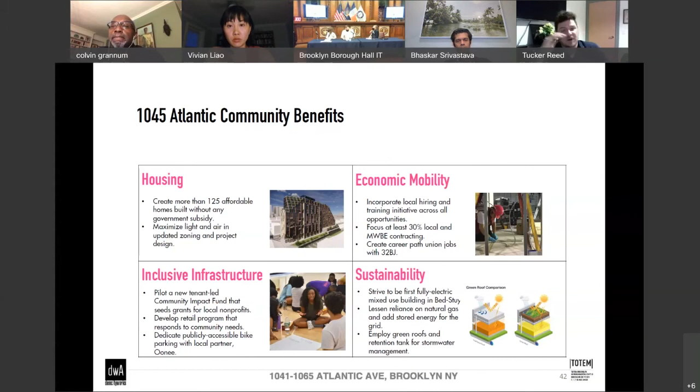Yes, sorry about that. Just generally, we partnered with a local entrepreneur, Shabazz Stewart from Oonee, who has been piloting publicly accessible, secure bike parking throughout the city. In this instance, we would not have an Oonee pod out on the street, but instead would look to integrate a bike parking hub into the building that would be publicly accessible to the neighborhood.

Great, thank you. I have a few questions. I think you've addressed some of them, but let me get them into the record and see if there's anything additional. Regarding the affordable housing units, what is the qualifying income for prospective households based on household size, the anticipated rents based on the number of bedrooms, and the distribution of units by bedroom size?

Great, so like I mentioned, we're really trying to target between 40 and 100% of AMI. So for instance, for a family of 3, that would work out to an income range of somewhere between $42,000, $43,000 a year up to $108,000 a year, from that 40 to 100 range.